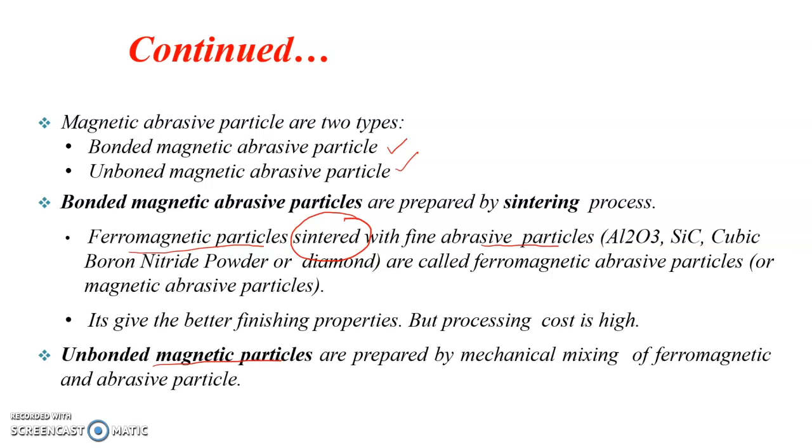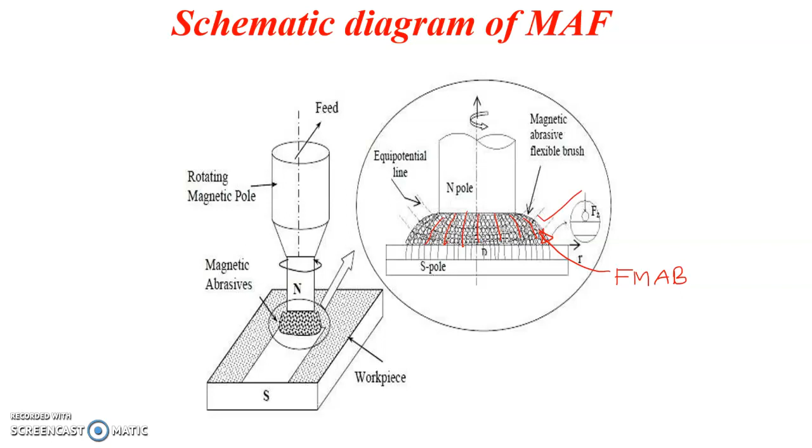This brush behaves like a multi-point cutting tool, and it removes the material because this pole is rotating. So this brush is also rotating, and by this rotation it removes the material in the form of microchips. That is shown in this picture.

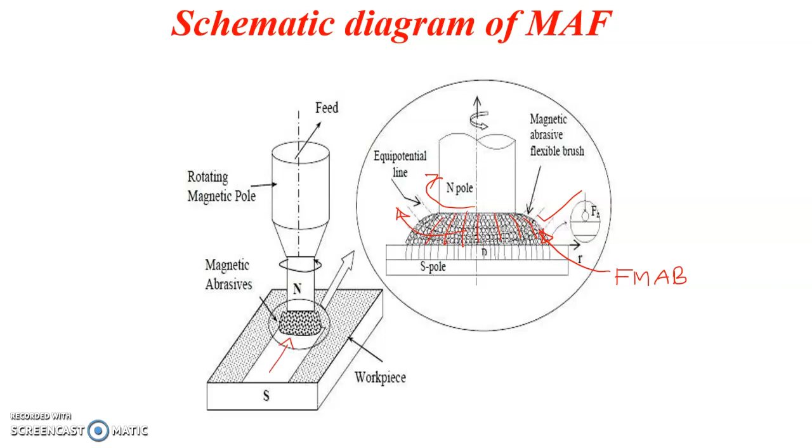Due to the magnetic field, forces act on the magnetic abrasive particles, and this force has two components. One is Fx, acting along the magnetic lines, in this direction. So in all magnetic lines, Fx is acting like this. Another component is Fy, which acts along equipotential magnetic lines, that is, lines at the same distance from the originating point of the magnetic flux. So if connected, it will be moving like this. The force acting along these equipotential magnetic lines is the Fy component.

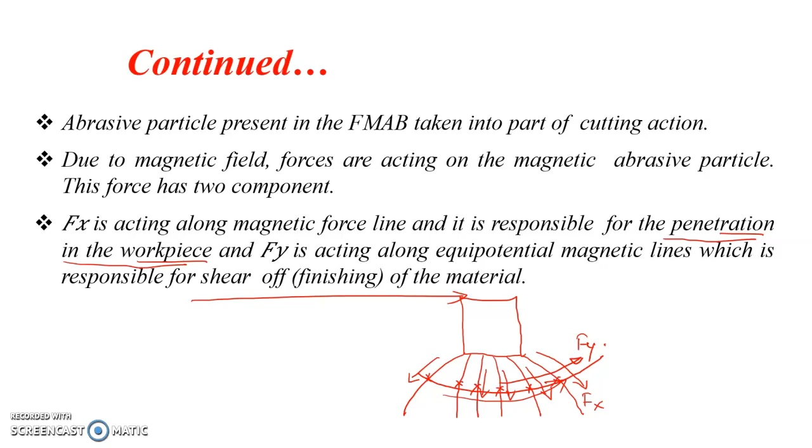The Fx component, because it is acting downwards, is responsible for the penetration in the workpiece. And Fy, acting along equipotential magnetic lines, is responsible for shearing off the material, because it is moving in a rotating fashion. So it is capable of shearing off the material, or otherwise, of finishing.

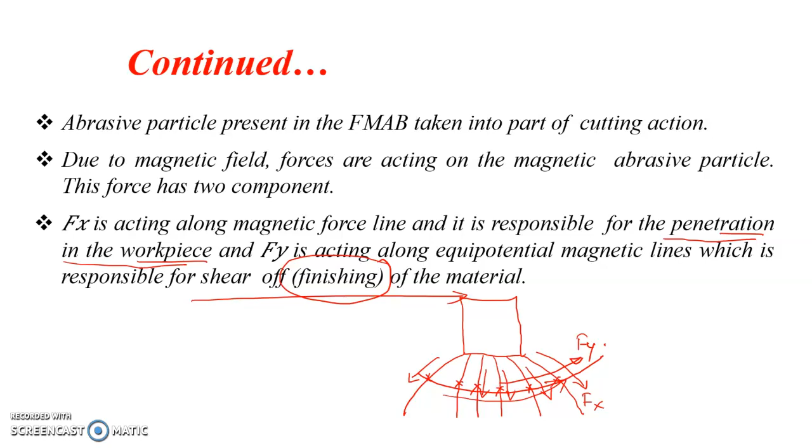The magnitude of these machining forces is very low, and thus the MRR is also very low, but they are capable of producing mirror-like surface finish with Ra values in the range of nanometers. The process parameters of MAF connected to material removal rate are grouped in four main categories.

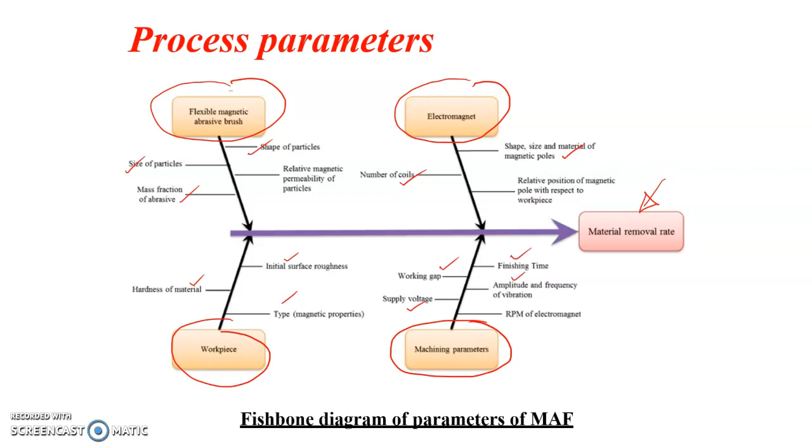One is the flexible magnetic abrasive brush, which covers the size of particles, shape of particles, mass fraction of abrasive, etc. The second group is the electromagnet, which considers the number of coils, shape, size and material of magnetic poles, etc. Then the workpiece factor, that is the hardness of the material, initial work surface roughness, types, etc. The final group is the machining parameters, that is the working gap, finishing time, amplitude and frequency of vibration, supply voltage, and the RPM of the electromagnet, etc.

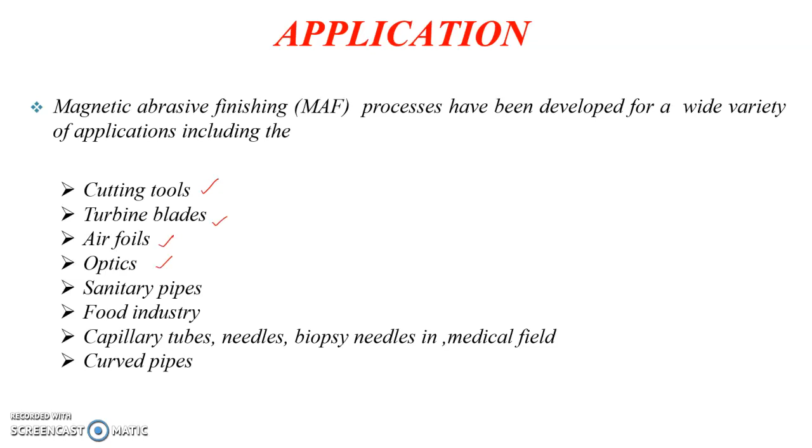The application of MAF can be seen in the area of cutting tools, that is production of cutting tools, turbine blades, airfoils, optics, sanitary pipes, food industry, capillary tubes, needles, biopsy needles, etc., which are used in the medical field, then curved pipes, etc.